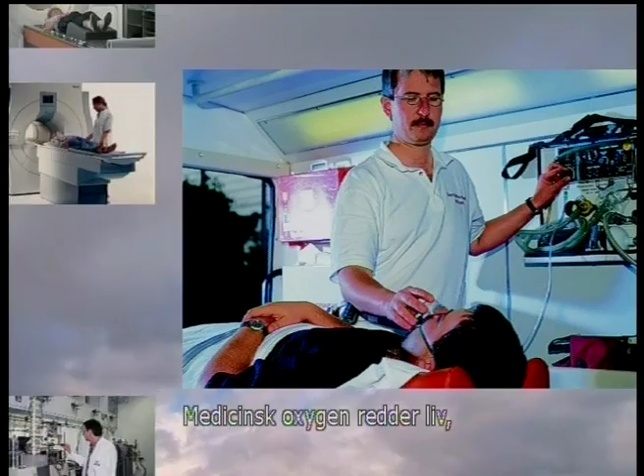Gases are volatile, not tangible, just invisible. Nevertheless, they are used in many different fields and secure the quality of our life. Medical oxygen saves lives. Helium cools magnetic resonance imaging scanners. Nitrogen is used for freezing food and ensures, in many cases, the right atmosphere. For example, for the packaging of ready-to-serve meals.

Special gases are important for the production of wafers, the carriers of electronic microchips. In welding seams, gases assure good durability. Oxygen is an important assistant for the environment, for example in wastewater treatment. In addition, it helps to reduce the energy consumption in many applications, like here in steel production. The broad area of application of these all-rounders is possible because of their diverse properties.

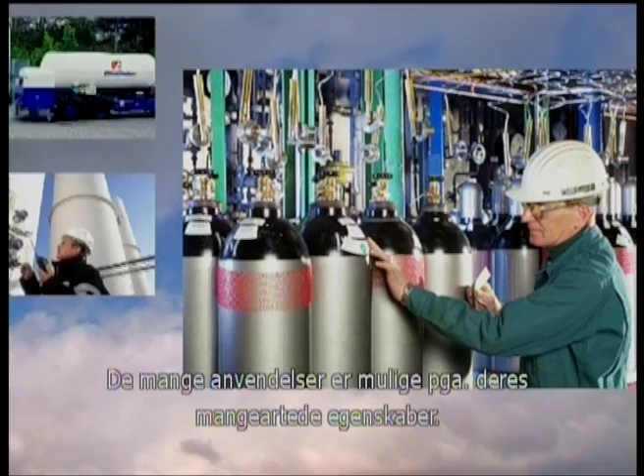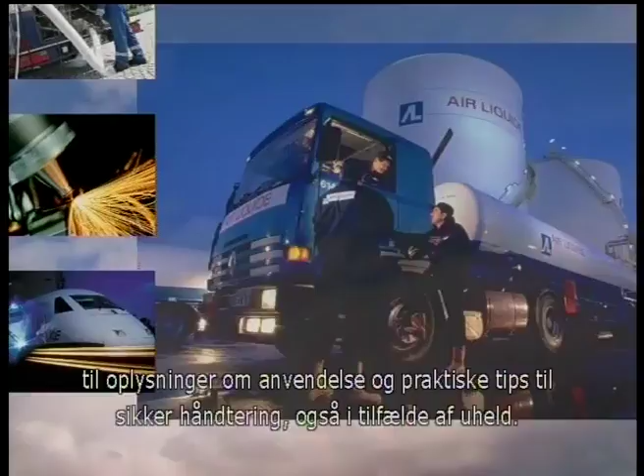People who are informed about gases and their application are well prepared for the safe handling of the gases. In this film, you'll learn a lot about gases, from production through transportation to the applications, information and practical tips for correct handling, also in case of emergencies.

For the Association of Industrial Gases, IGV, and its member companies, the protection of man and the environment come first. This is also documented in the low accident rate in our branch as compared with other industries.

Air consists of 78% nitrogen, 21% oxygen, 1% argon, and traces of other rare gases. It is precisely this mixture which makes our life on Earth possible and is the basis for many gases. But what are industrial gases? This term covers not only industrially produced gases, which are used in processes in industry and trade, but also rare gases and high-purity gases, as well as gas mixtures.

Gases are divided into 4 groups according to their inherent fundamental dangers: inert, combustible, gases assisting combustion, poisonous and corrosive gases. The first group are the inert gases, for example nitrogen and argon. Inert gases are capable of displacing the air containing oxygen and can, in high concentrations, create a suffocating effect.

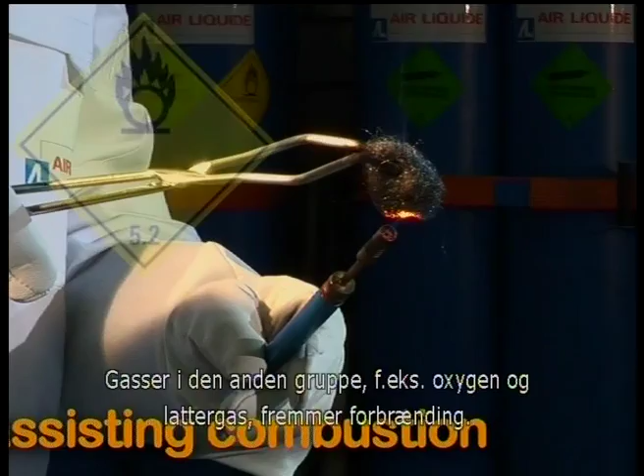Gases in the second group, for example oxygen and laughing gas, assist the combustion process, although they are themselves not flammable. The next group includes the flammable gases, which together with air can produce an explosive mixture. These include, in particular, acetylene, propane and hydrogen. The fourth group, containing poisonous and corrosive gases such as ammonia, fluorine and arsine, are rarely used, so we shall not deal with the group here.

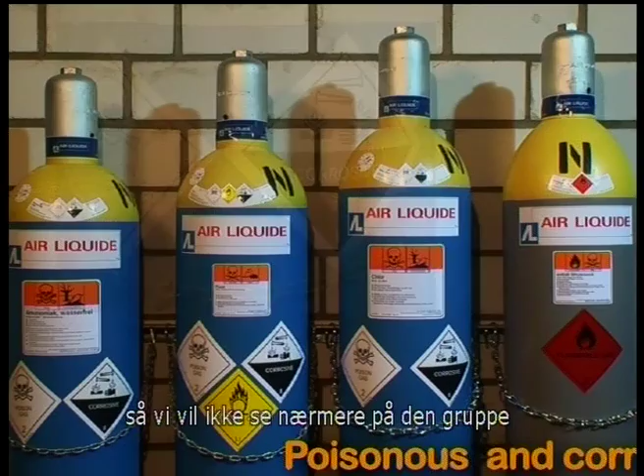Groups of gases. Inert gases, for example nitrogen and argon: danger of asphyxiation. Gases assisting combustion, for example oxygen and laughing gas: combustion accelerator. Flammable gases, for example hydrogen and propane: danger of fire. Poisonous gases, for example chlorine and carbon monoxide: danger of poisoning.

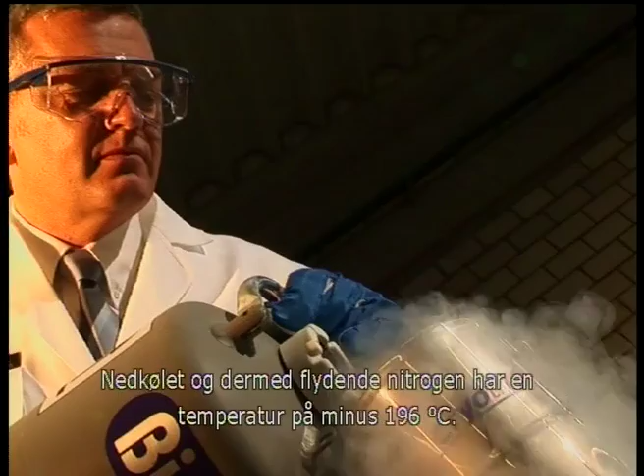At the beginning of our short test series, we will show you the liquid and solid aggregate state of gases and also some effects which can occur when gases are released in an uncontrolled manner. Superchilled and therefore liquefied nitrogen has a temperature of -196 degrees Celsius. It condenses the air to fog when transferred.

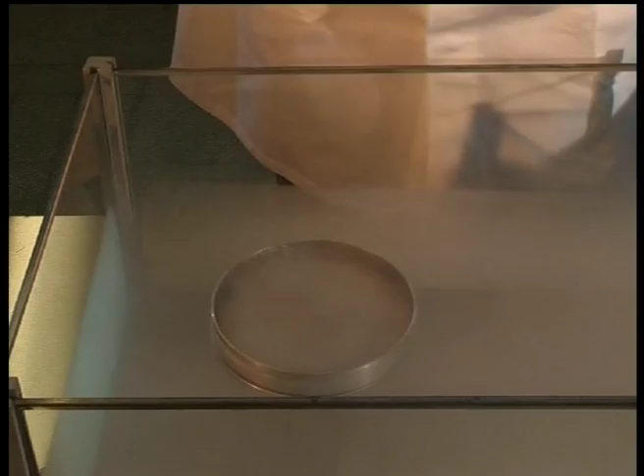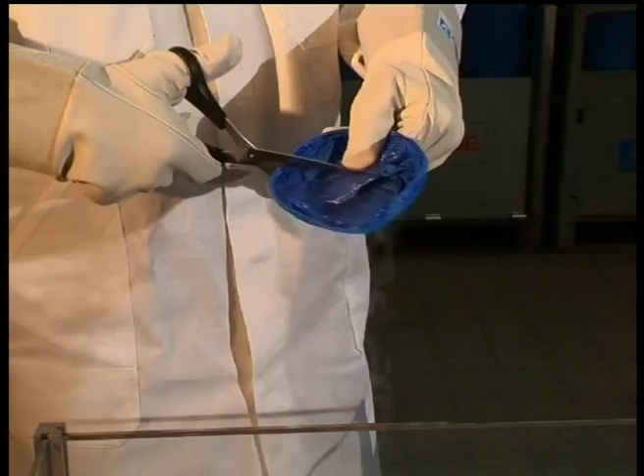If a balloon filled with carbon dioxide is immersed into the bubbling nitrogen, the carbon dioxide inside the balloon condenses below -78 degrees Celsius. It changes into a solid aggregate state, taking the form of carbon dioxide snow.

Contact with superchilled cryogenic liquefied gases makes material brittle. Even a soft, flexible rubber hose turns into a frozen rock-hard material. In this state, it is so brittle that it shatters. Most gases are colorless, odorless and tasteless.

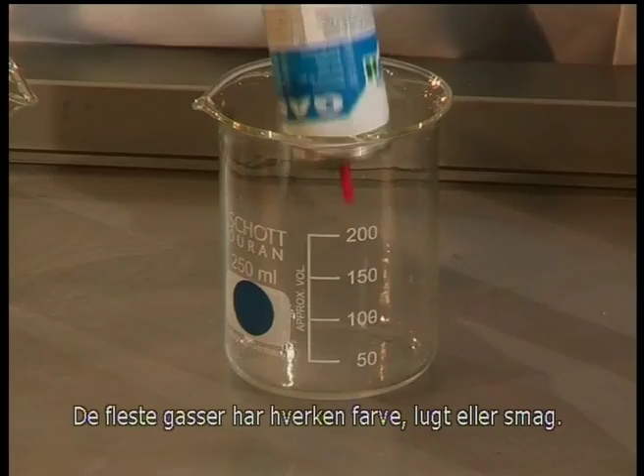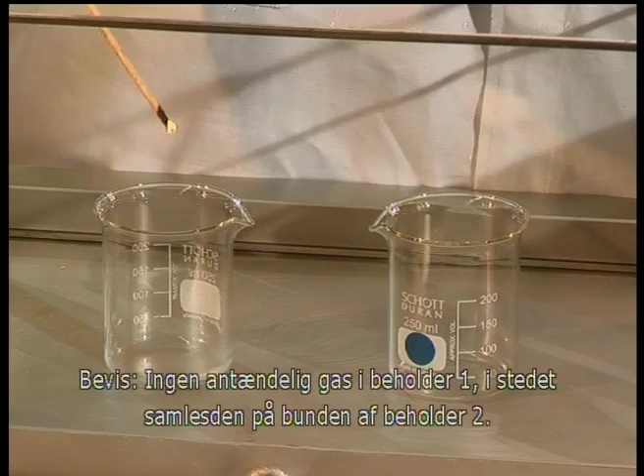Filling a container with a combustible gas, which is heavier than air, leaves such gases at the bottom of the container. This enables propane to be transferred like a liquid. The proof: no combustible gas remains in vessel 1. Instead, it is collected at the bottom of vessel 2, where it becomes a source of combustible matter.

Nitrogen is an inert and not flammable gas, which displaces the oxygen contained in air from this container. The candles extinguish. For this reason, nitrogen is used to put out fires in silos and in mines.

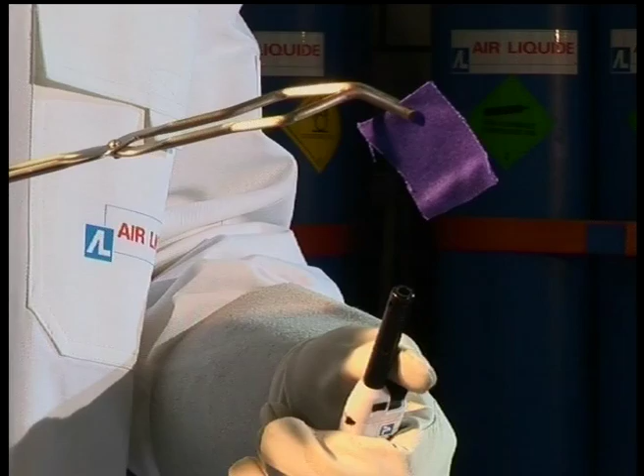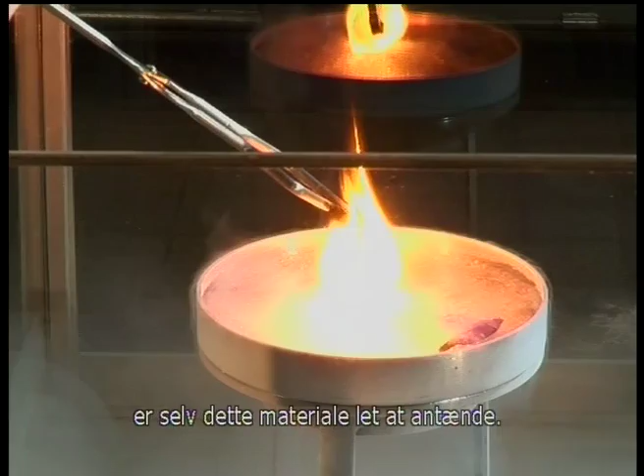Contrary to the inert effect of nitrogen, oxygen increases the rate of burning, as shown here with a cigarette. The same applies to other materials. The specially treated cotton of a boiler suit is difficult to ignite. However, after enriching with oxygen, even this material is easily ignited. The same effect is shown on this ball of steel wool, which quickly burns with the aid of oxygen.

Finally, a test using flammable gases which require our undivided attention. This balloon contains a mixture of oxygen and hydrogen. Ignition leads to immediate combustion. The result is an explosion.

The ignition limits indicate the concentration of a gas in the air which is necessary for it to ignite. For acetylene, this is between 2 and 100%, and for hydrogen between 4 and 76%. The minimum flammability energy for flammable gas concentrations for acetylene and hydrogen is only 0.019 milliwatt-second. The flammability energy which is released during an electrostatic charge between a person and the ground is umpteen times that which is necessary to ignite gases, for example, hydrogen.

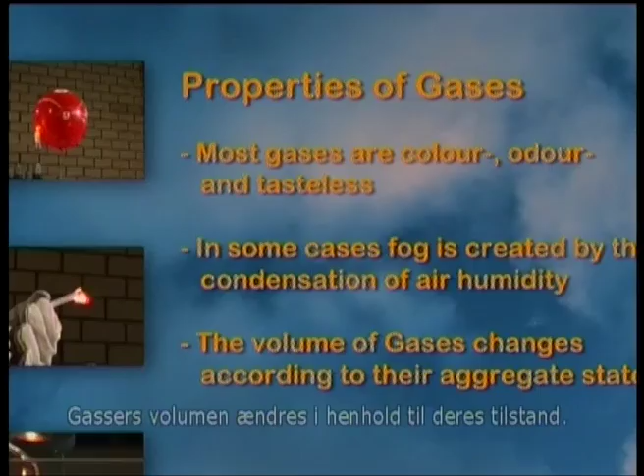Properties of gases. Most gases are colorless, odorless, and tasteless. In some cases, fog is created by the condensation of air humidity. The volume of gases changes according to their aggregate state.

There are various ways of manufacturing these gases. An important group of technical gases are the air gases nitrogen, oxygen, and argon. These are produced by separating the natural constituents of air. For this purpose, air is made liquid in an air separation plant. The necessary processes are compression, expansion, and chilling. The gases are separated in the cold box tower.

The separation of the constituent parts of air is based on the different temperatures at which oxygen, argon, and nitrogen liquefy. Oxygen becomes a liquid at normal atmospheric pressure at -183 degrees Celsius, argon at -186 degrees Celsius, and nitrogen at -196 degrees Celsius. All gases produced are liquefied into a super-chilled state and stored in such specially insulated bulk storage tanks slightly above atmospheric pressure.

Depending on the application and quantity required, the gases are then filled into cylinders, in a liquid state into tankers, or transferred by pipeline. Since pipelines direct to customers are generally operated by gas companies, we will concentrate here on the other methods of delivery.

When using cryogenic gases, protective clothes must be used because the extreme cold of liquefied gases can cause injuries similar to burns. Safety glasses, protective gloves, and closed safety shoes are important. Cryogenic liquefied gases are classified as dangerous goods transport. All drivers of tankers for dangerous goods transport must be specially trained for handling and transport.

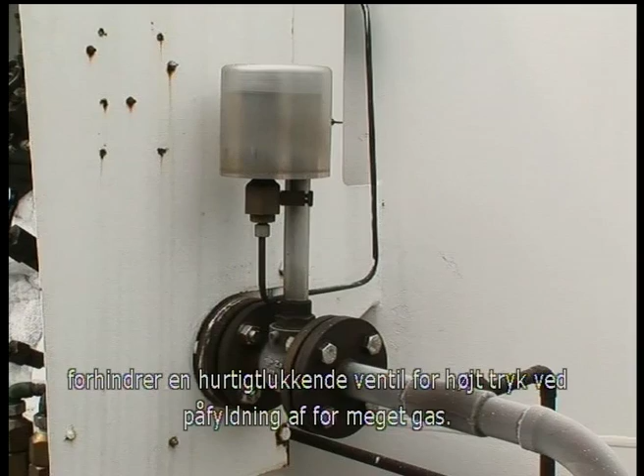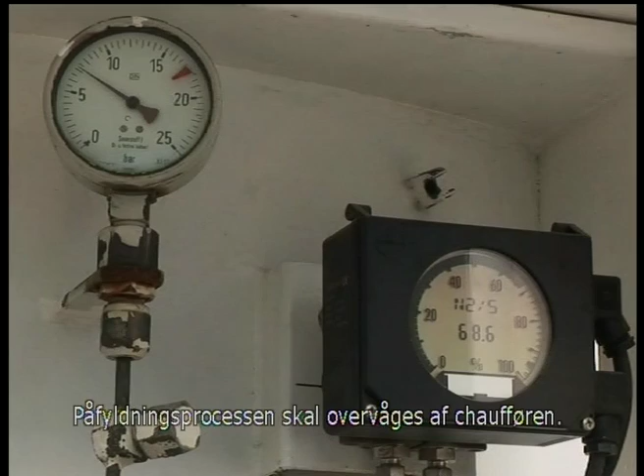Before filling commences, the driver must put up warning signs. Whilst the double-walled and vacuum-insulated storage tank is being filled, a quick closing facility prevents undue pressure beyond the acceptable limit through filling too much gas into the container. The whole filling process must be monitored by the driver. He checks the condition of the installation, records possible defects, and reports these as needing maintenance.

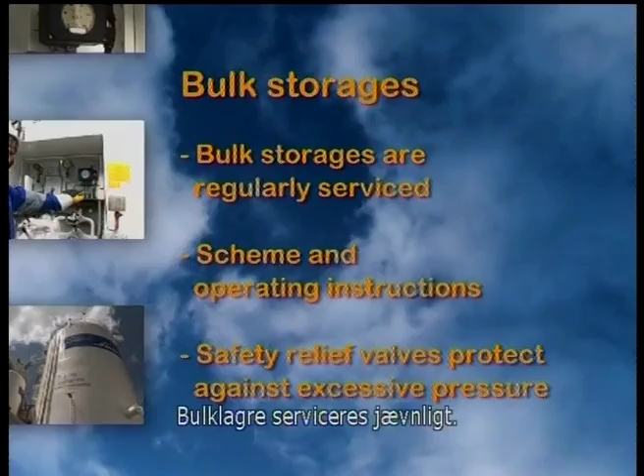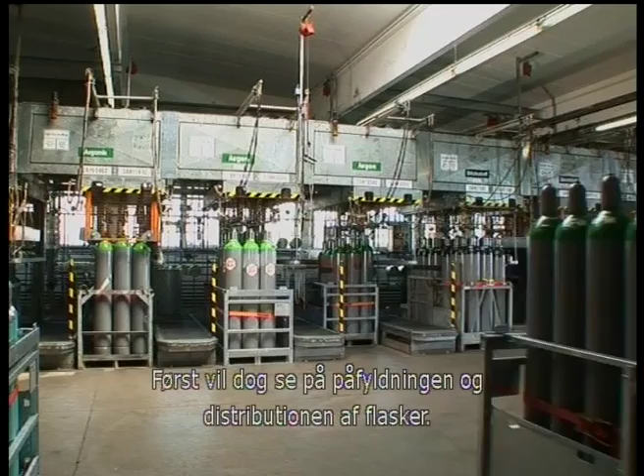Like the transport of cryogenic liquefied gases, the transport of cylinder gases is classified as dangerous goods transport, and special safety precautions need to be observed. But first, we have to look at the cylinder filling operation and the distribution. To guarantee the safety of the cylinder, the cylinders are regularly and repeatedly tested. Before filling, the cylinders are checked for filling capacity and the correct labeling.

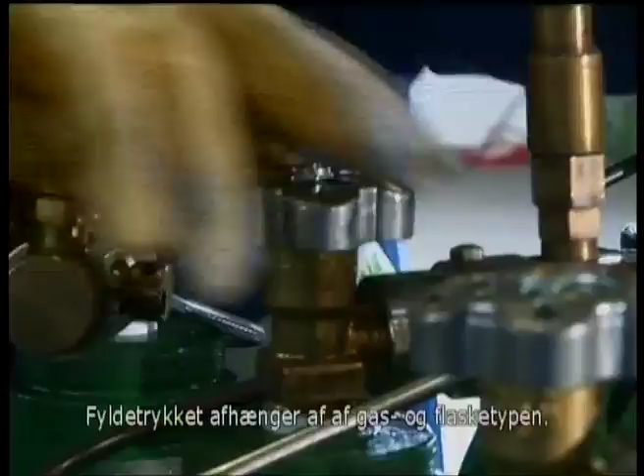The filling pressure depends on the type of gases and cylinders. The pressure range is usually 200 to 300 bar and could be up to 700 bar for special products. After filling, the tightness and temperature of the cylinders are checked. The temperature of the cylinder indicates the correct filling.

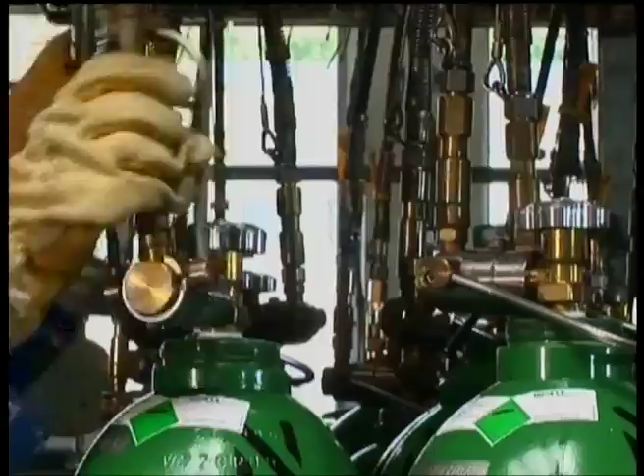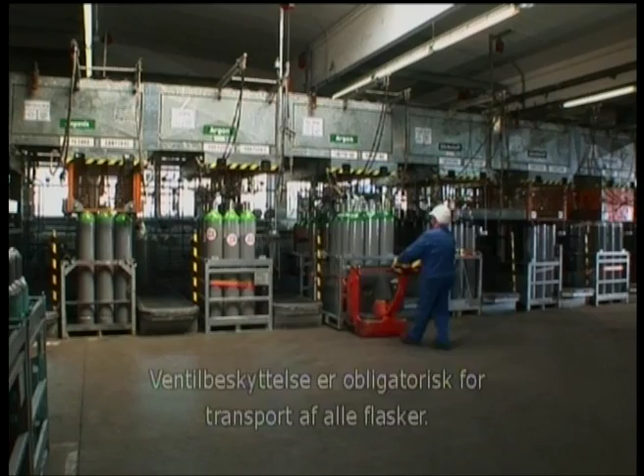The valves are closed, the connections are checked, and the safety caps screwed on if the cylinder is not equipped with a cage. For the transport of all cylinders, a valve protection is obligatory. This is also necessary for small cylinders. All cylinders have to be stored in well-ventilated areas.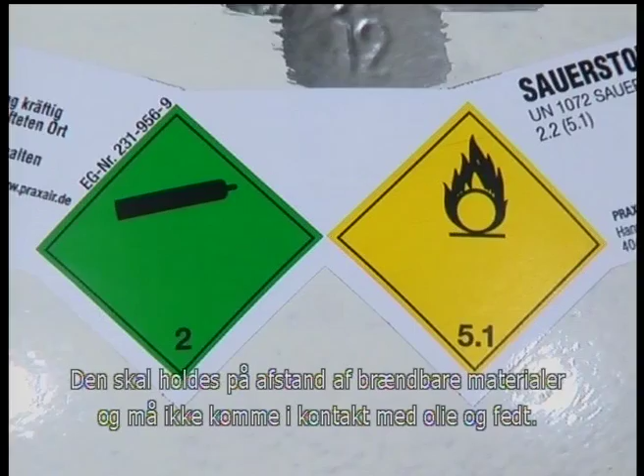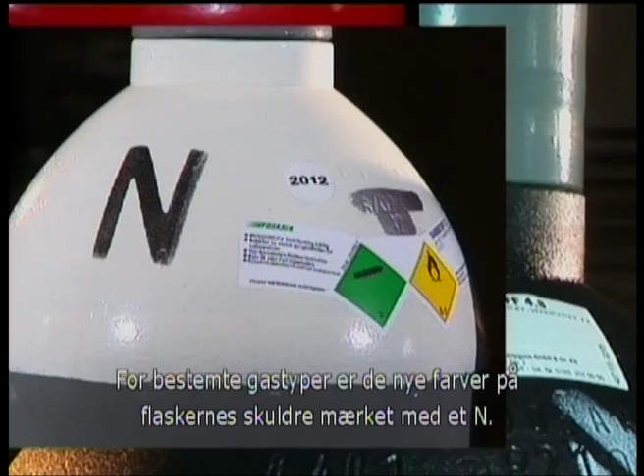The colour of this cylinder shoulder also gives indications about the danger of the contents of the cylinder. There is a new European standard for cylinder colours. For a certain time, the new colours of the cylinder shoulder are marked with the letter N. The shoulders are marked as follows: black for nitrogen, white for oxygen. Acetylene can be identified by a brown chestnut colour. All other flammable gases are marked red, inert gases grey or green.

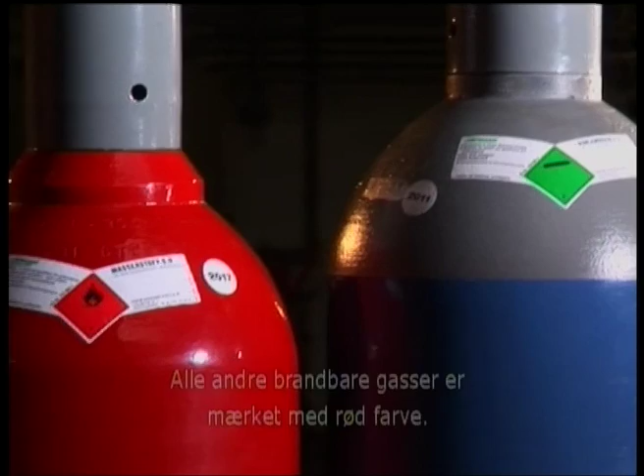Gas cylinders. Cylinders are retested regularly. The colour of the cylinder shoulder gives immediate information about the main properties. The dangerous goods label gives information about content and manufacturer.

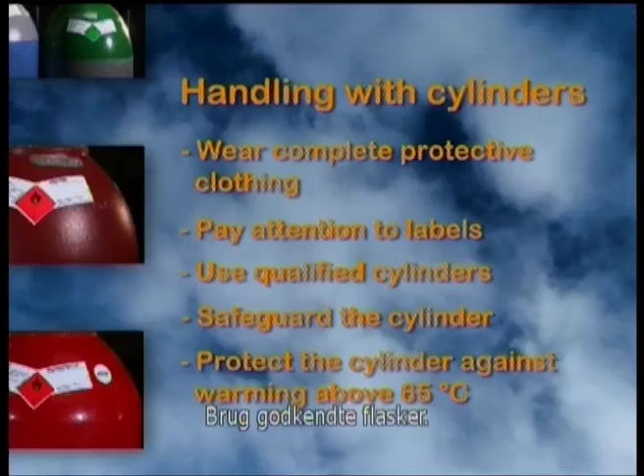Handling with cylinders. Wear complete protective clothing. Pay attention to labels. Use qualified cylinders. Safeguard the cylinder. Protect the cylinder against warming above 65 degrees Celsius.

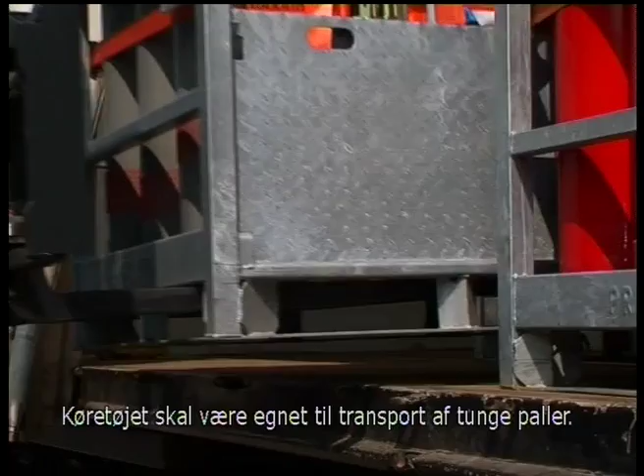The transport of gases is regulated by the Dangerous Goods Regulations for land and rail transport, and also the European Agreement ADR-RID. The vehicle must be suitable for carrying such heavy pallets. The total permissible gross laden weight of the vehicle and the maximum axle load must not be exceeded.

If certain load limits are exceeded, then the driver must have training in the transportation of dangerous substances. In these cases, the orange sign identifies the load as one containing dangerous substances. The documentation, which every driver must carry, includes accident data sheet, complete and correct freight papers, fire extinguisher, warning signs, and the required protective clothing.

For all participants, the transport of dangerous goods is regulated. However, exceptions for special cases are also officially regulated. For example, the ADR training certificate and carrying the accident leaflet can be exempted if only a limited amount is transported.

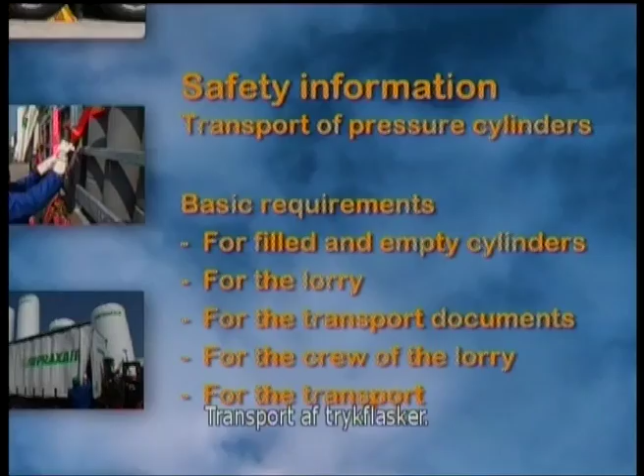Safety information. Transport of pressure cylinders. Notice basic requirements for filled and empty cylinders, for the lorry, for the transport documents, for the crew of the lorry, for the transport.

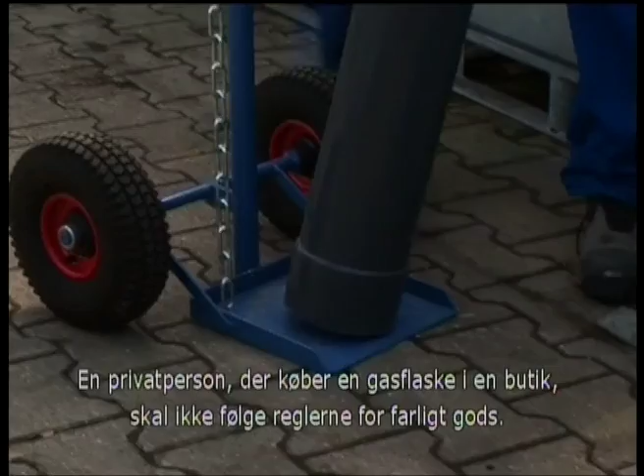A private person who buys a gas cylinder from the shopkeeper need not follow the dangerous goods regulations. However, they have to take necessary measures for safe transport.

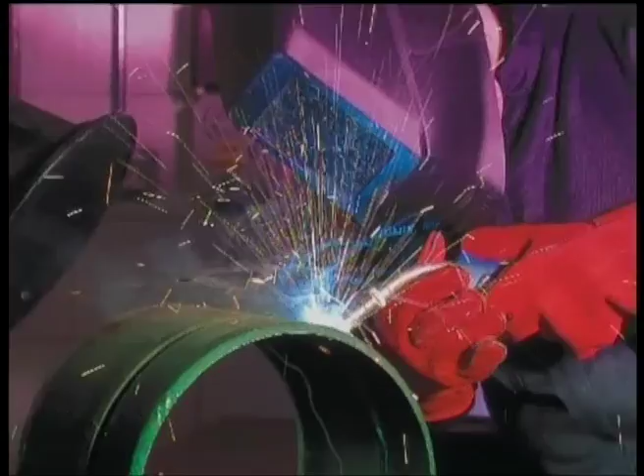Companies and traders using gases are also extensively exempted from the dangerous goods regulations. But the exemption is only valid if the valve protection and the load security is in accordance with the rules, and a fire extinguisher is carried.

Transport of gas cylinders. Wear protective clothing. No smoking. Open flames should not be used. Close the valve tightly and transport only with valve protection. Secure the cylinder and protect from heat. Ensure sufficient ventilation. Do not transport the cylinders with products which can ignite easily.

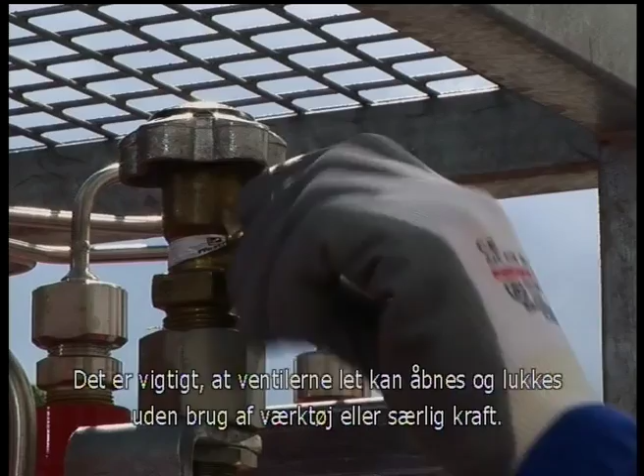A gas supply station, which is installed properly and regularly inspected, ensures the safe handling of gases. Also, all operating instructions for the appropriate use of the installation should be followed. It is important that valves can be opened and closed easily without the use of tools or force.

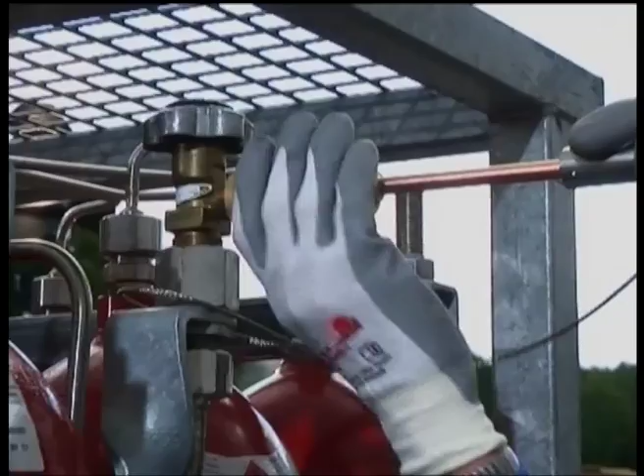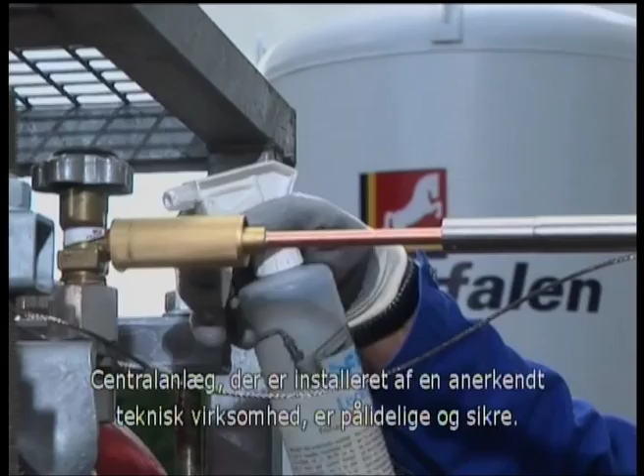Gas supply stations, which are installed by a technical company, are reliable and safe. Even then, it is necessary to test the tightness of the whole installation with a test spray for leakages, so that the gas cannot escape in an uncontrolled manner.

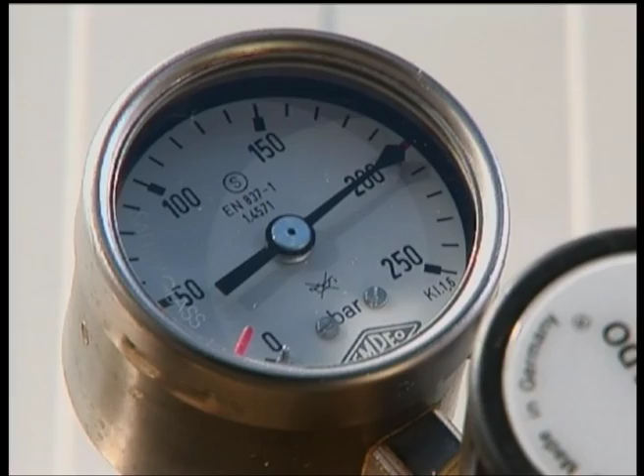Gas supply station. Installation by technical companies and signs, labels. Operating valves without tools. Carrying out tightness tests regularly.

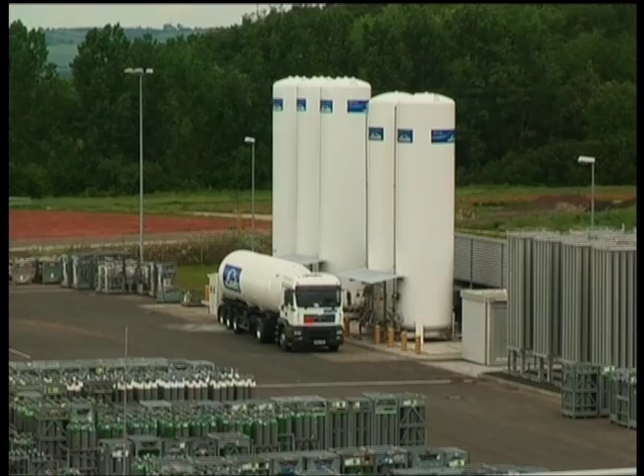In spite of high safety standards and precautions, accidents cannot be totally ruled out. Therefore, it is good to know how to ensure safety in the following situations without endangering oneself or other persons. Gas equipment can develop leaks. For example, if an unsecured cylinder without valve protection falls over and the valve is damaged or opened.

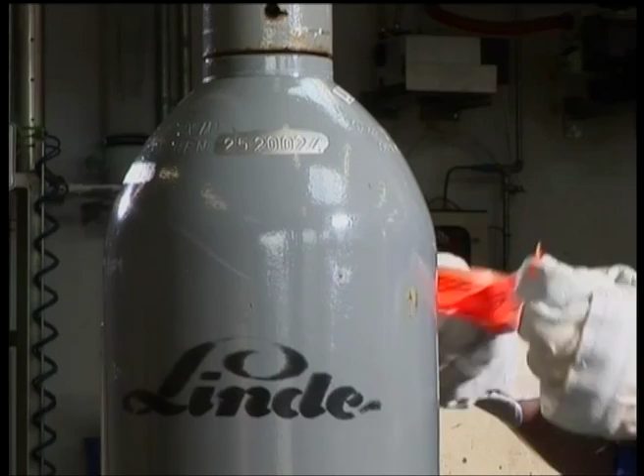In this case, the first measure would be to attempt to close the valve. If the gas leak cannot be stopped, but only a small amount of gas is escaping, move the bottle immediately to a safe place in the open. Ensure that you do not breathe in high gas concentrations. Cylinders of non-poisonous gases can be safely left to empty in the open. The relatively small quantity of gas which escapes does not represent any danger.

If substantial quantities of gas escape, for example from a cylinder rack, disperse the gas with a jet of water. This can prevent flammable gases from being set alight. This measure is also appropriate when water-soluble gases escape, such as carbon dioxide or ammonia. The fire brigade should perform this measure.

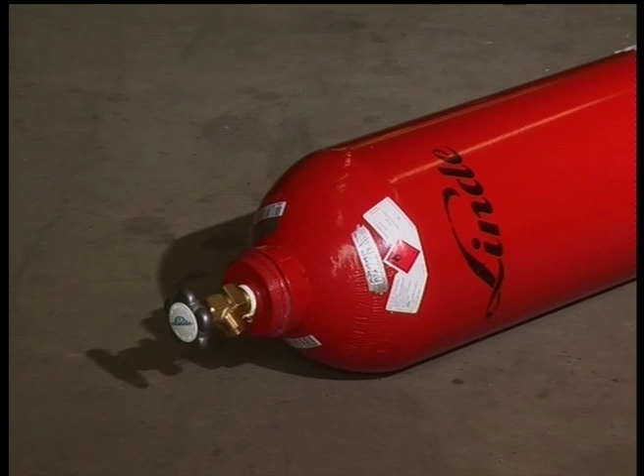If a gas cylinder from which large quantities of gas are escaping is located inside, this cylinder should be left to its own devices. Open doors and windows to the outside to improve ventilation and reduce dangerous gas concentrations. All machines should, where possible, be switched off.

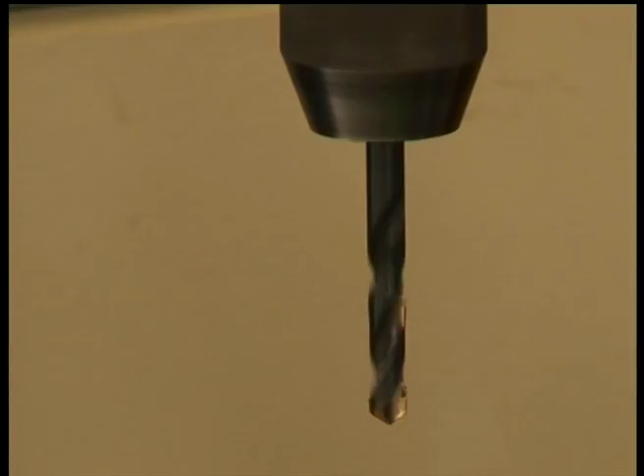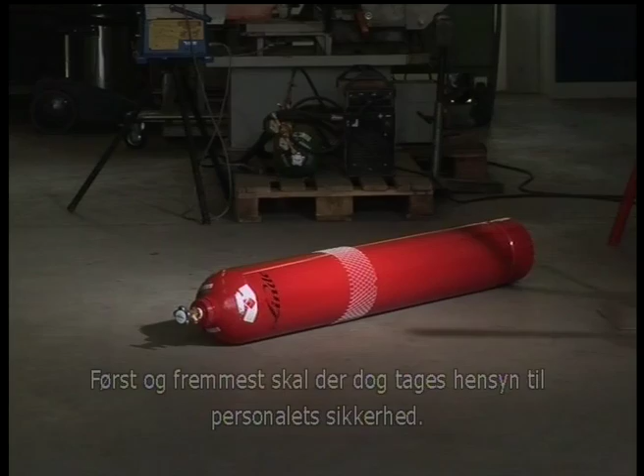If the escaping gas is a flammable gas, possible sources of ignition, such as open flames, should also be extinguished whilst leaving the area. However, top priority should be given to the safety of all personnel. If no further gas escapes and the area is adequately ventilated, personnel can safely return.

If larger quantities of gas have escaped in a poorly ventilated area, check the gas concentration before re-entering the area, where necessary with the assistance of the local fire services.

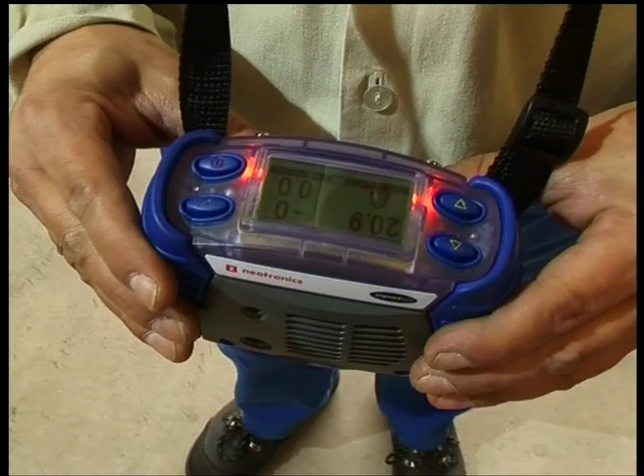Cylinder. Leaking valve. Close valve manually or take the cylinder into the open air. High gas concentrations in closed area. When necessary, alert the fire brigade. Open doors and windows. Evacuate personnel. Switch off machines and douse possible sources of ignition. Concentration of gas should be measured again before re-entering the area. Attention! Some gases are heavier than air and collect in lower regions.

Even if the gas leaving the cylinder catches fire, an attempt should first be made to close the cylinder valve. Caution! It can be extremely hot. Therefore, safety gloves should be worn for protection. If this is accomplished, the flame too will extinguish. This measure is as appropriate indoors as out.

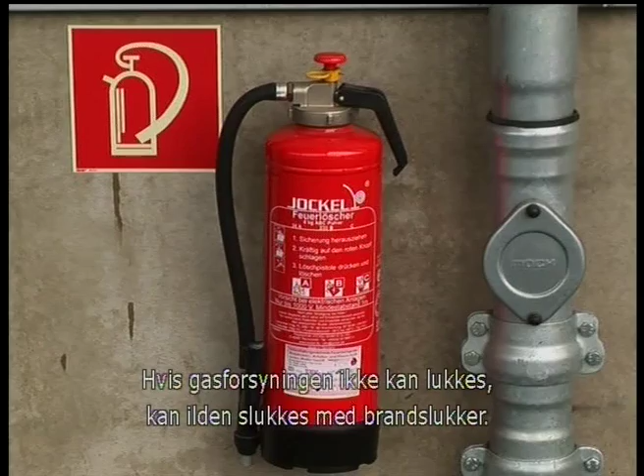If the gas supply cannot be turned off, the fire can be put out with a fire extinguisher. However, this means that gas still escapes and could ignite again. This attempt to put out the fire should therefore not be made indoors. Here you should simply try to prevent the fire from spreading to other gases and combustible material and let the bottle burn itself out. This is also the best solution outdoors, provided the fire cannot spread. In all cases, notify the fire services.

You must pay particular attention to propane and CO2, which are heavier than air, to avoid them collecting in drains and cellars. If in doubt, close off the area and inform both the fire services and the gas supplier.

Where gas cylinders are close to a neighbouring fire, depending on temperature, duration and the type of gas concerned, there can be a danger of cylinders bursting. This is particularly the case with acetylene cylinders. Because of the risk of bursting cylinders, do not approach cylinders. Immediately notify the fire services and the gas supplier. Then cool the cylinders at once with water from a secure position.

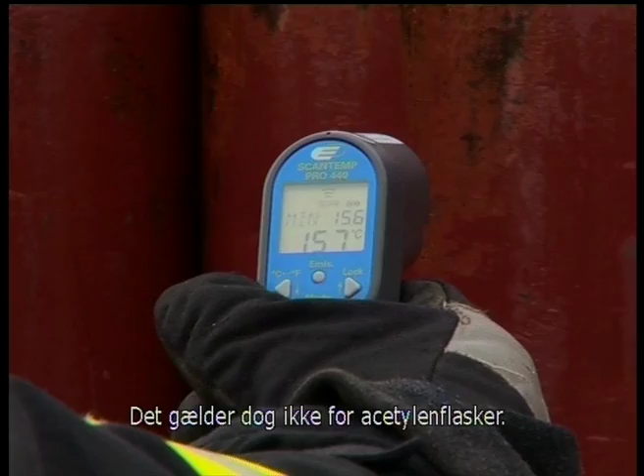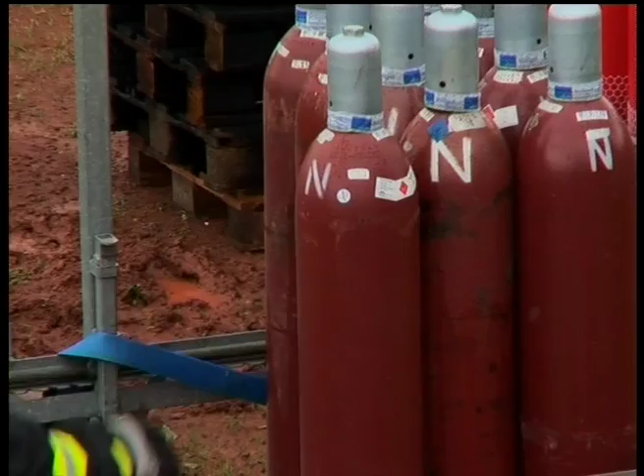Continue cooling until no more water steams off the bottles. Only when this state has been reached may the bottles be transported, except for acetylene cylinders. The rule for acetylene cylinders is that they should be cooled with water and periodically tested with a distance thermometer to see whether they warm up again. If the cylinder becomes warm again, it must be cooled. The cause for this danger is possible acetylene decomposition.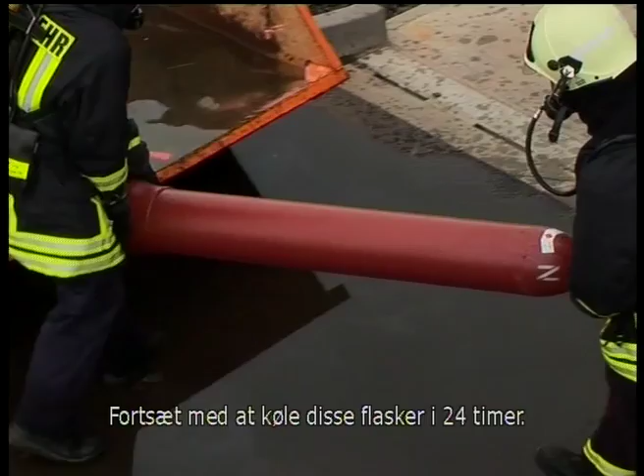Continue cooling these bottles for a full 24 hours. This can be best achieved in a water bath. This may be any water basin, even an improvised one. Gas cylinders. Fire. Close the valves with safety gloves. In the open, use a fire extinguisher to put out the fire. Prevent the fire spreading. Let the container burn itself out. If necessary, cool the cylinder.

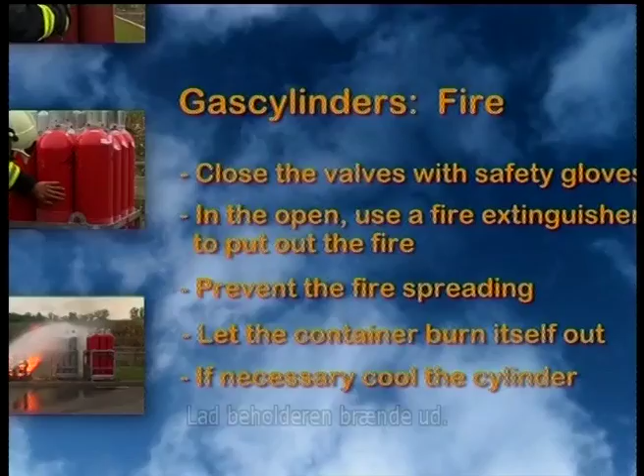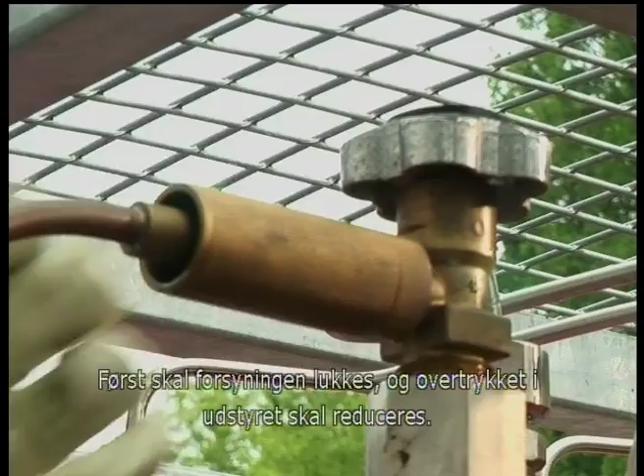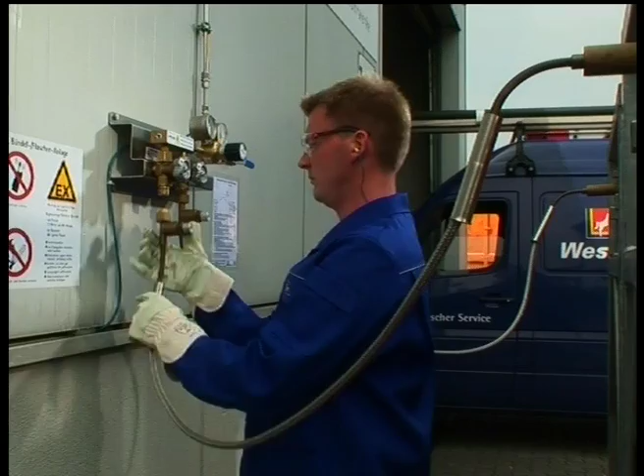Occasionally, gas equipment can develop leaks, for instance, at a connection. In this case, the technical service of the gas supplier should be informed. To deal with this fault, initially the supply must be closed and the overpressure in the equipment must be reduced. Afterwards, the leak can be fixed by lightly tightening the connection or replacing the seal. Finally, the connection should be sprayed and checked visually.

Gas supply station. Leaky. Close off the gas supply. Reduce the overpressure. Mend the leak.

Accidents with tankers carrying superchilled liquid gases are relatively rare. If, nevertheless, such an accident should occur, firstly, stay calm and proceed in an orderly fashion. In practice, this means securing the accident area. Then the driver should notify the police and his company.

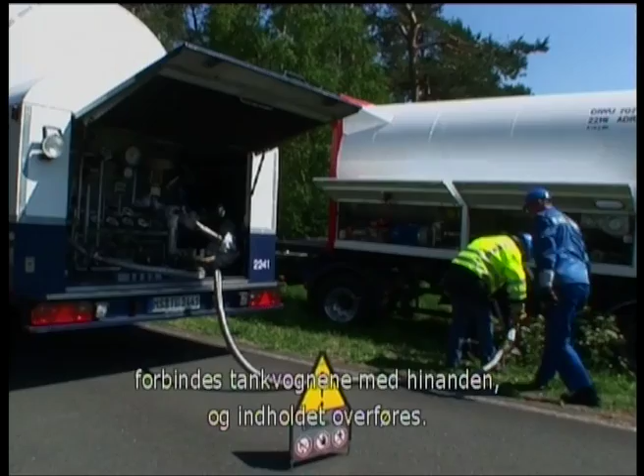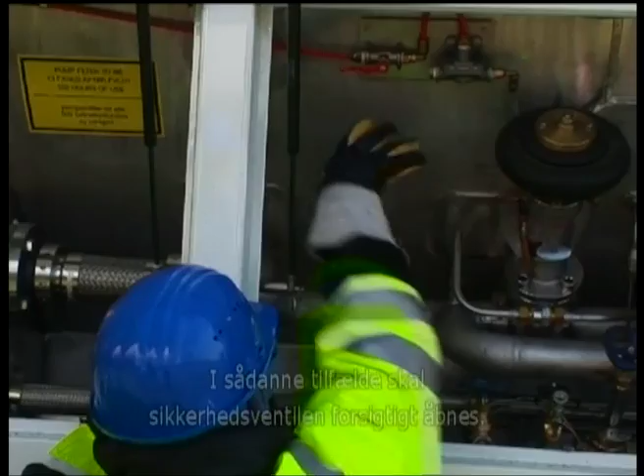After the tanker and the specialist have arrived on the scene, the options of transferring the product can be checked. Where connections are accessible and no extraordinary dangers are apparent, the tanker is connected and the contents transferred. Depending on volume and product, this may take between 2 and 6 hours. The situation is quite different if the tank pressure has risen. In such cases, the pressure relief valve must be carefully opened.

Depending on the position of the accident vehicle, super-chilled liquefied gas may escape. This means risk of injury through cold. If larger quantities escape, the road surface and ground may freeze. Depending on the relevant product, danger may occur through oxygen enrichment, displacement of breathing air, or fire. As soon as liquid gas is expelled, the pressure relief valve must immediately be closed again. In such circumstances, alternative valves may also be used to relieve the pressure. However, this requires a thorough knowledge of the piping system and of the product characteristics.

Oxygen poses a special problem. If oxygen penetrates an asphalt surface, explosions can occur. Therefore, in the case of a tarmacadam road, oxygen must be diverted through a hose or the road surface covered with a suitable material. Air gases may also be drained in a controlled manner and without causing any environmental pollution.

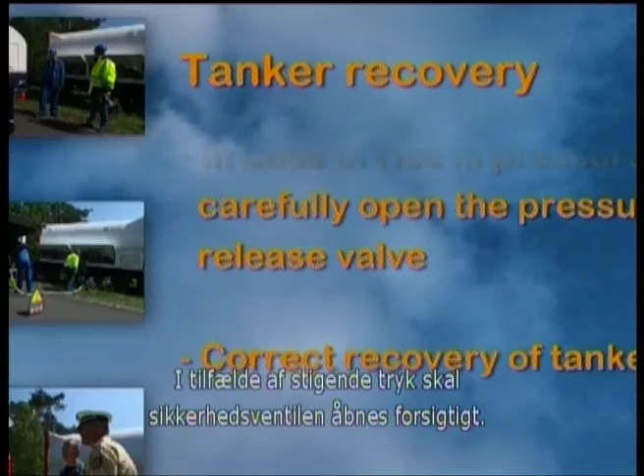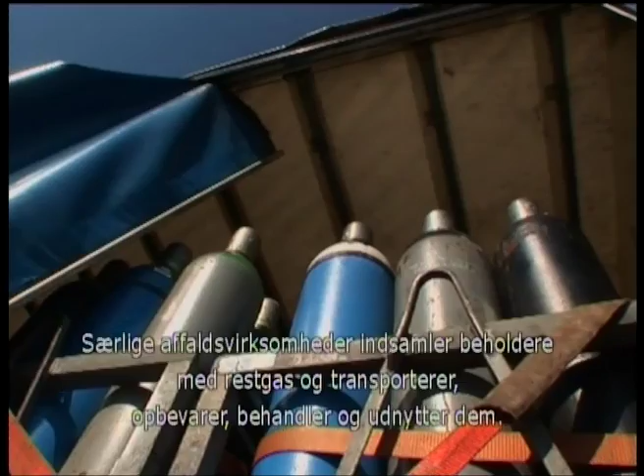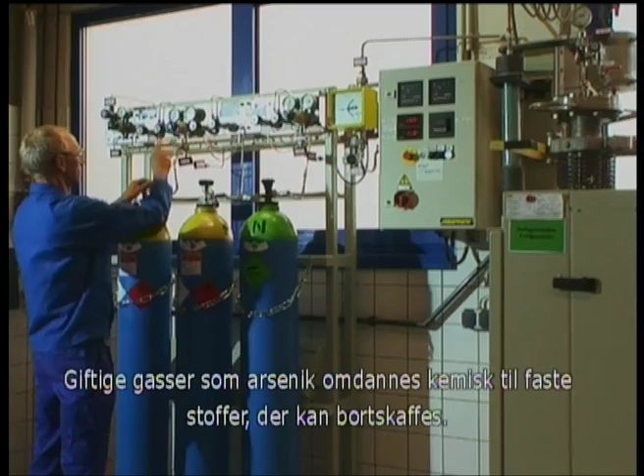Poisonous or flammable gases in cylinders need to be specially disposed of according to regulations. Special waste disposal companies may collect containers with residual content, transport, store, treat and make use of it. Residual gas disposal can be effected in various different ways. For example, through absorption of chlorine and ammonia in a wet washing process. Poisonous gases like arsenic are transformed by chemical conversion into disposable solids. Another possibility is the combustion of residual gases. These and other processes ensure a safe and ecologically harmless disposal of residual gases.

The user may transport only containers which are in perfect condition. If a container is defective or the content not identifiable, the container cannot be transported.

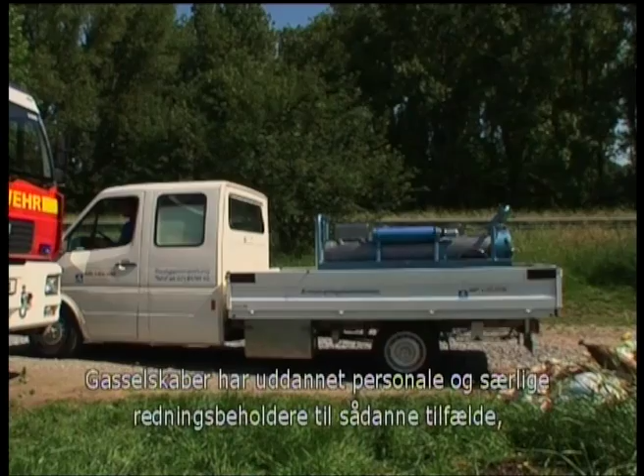Gas companies have trained personnel and special rescue containers available for this case in order to transport the cylinder to the special waste disposal company. Recovery of a gas cylinder. Disposal of poisonous and flammable gases only by special waste disposal companies. Transport of containers in perfect condition always possible. Transport of defective containers or containers with unknown content is only possible by special waste disposal companies.

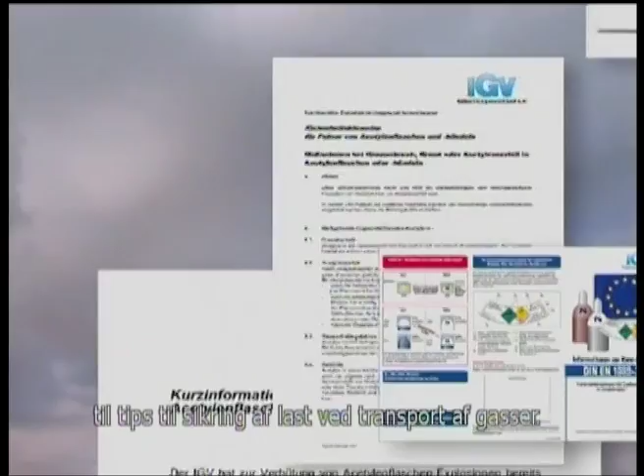For the Association of Industrial Gases, IGV, and the member companies, safety and the protection of man and his environment has priority. Therefore, we provide extensive information for the safe handling of gases, from specific gases safety sheets, through notes for special activities and situations, to tips for load securing for the transport of gases. You will also find a file on this DVD which you can open with a personal computer with additional information for the safe handling of gases.